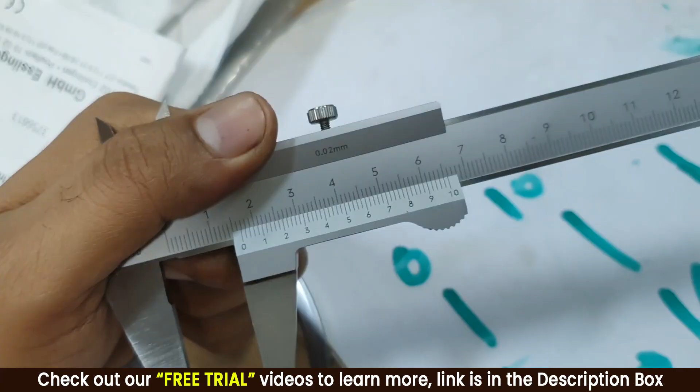Main scale division is 16 mm. Now let me see which value of the vernier scale is coinciding with the main scale division reading. Let me see. Is it 0? No. Is it 1? No. Is it 2? No. 3? No. 4? No. 5? No. 6? No. 7? No. 8? No. Yeah, it is very close to 9, guys.

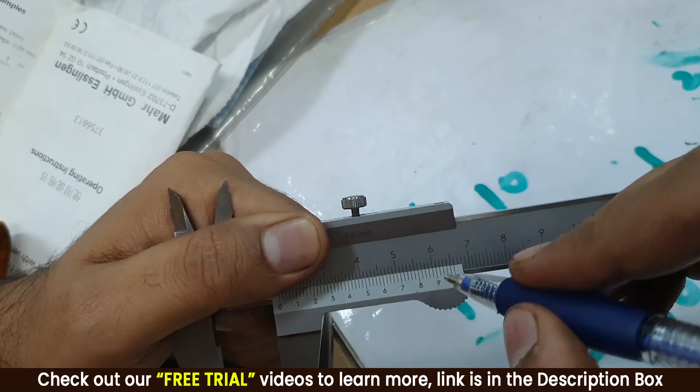Now let me see very carefully which one is it. It is either this one or this one. If I be accurate, I'll say this one is completely matching with this one.

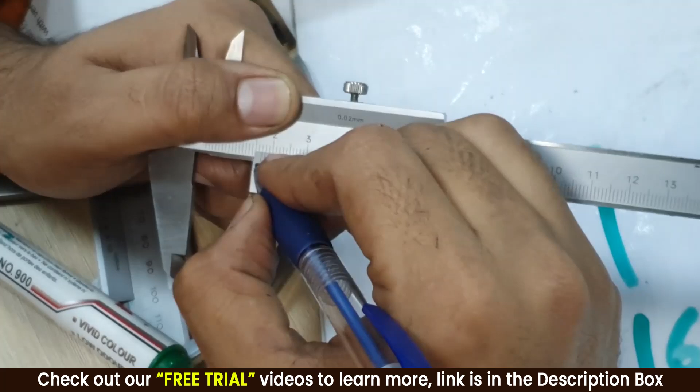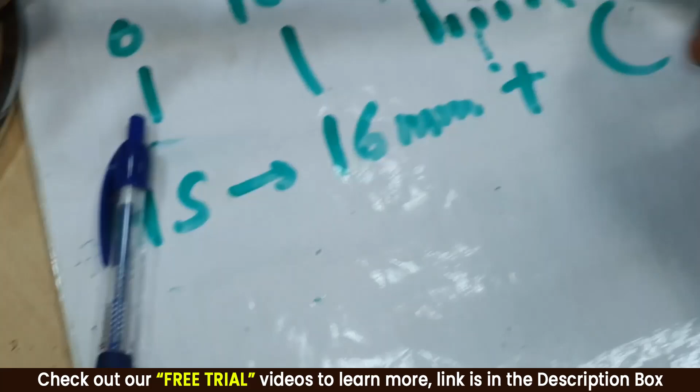Which division is it now? 1, 2, 3, 4, 5, 6, 7, 8, 9, 10, 11, 12, 13, 14, 15, 20, 25, 30, 35, 40, 44th division. So this means 44 into least count.

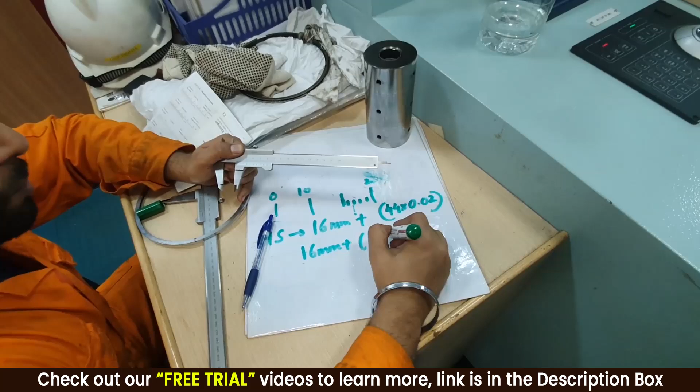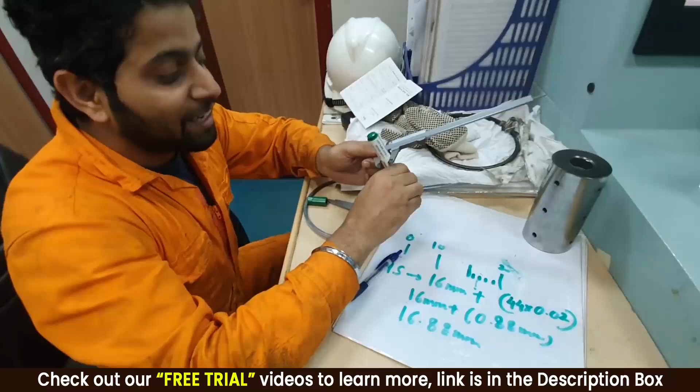The least count is 0.02. That means 16 mm plus 44 into 0.02 is 0.88 mm. So it becomes 16.88 mm. That is the outside diameter of this over here, guys, this marker. I hope you have understood the vernier caliper.

Now let me explain you how to take measurement with the vernier caliper. Now let me talk about how to take measurement with the outside micrometer.

Jai Mata Di. Now guys, see, this is a vernier. This is a micrometer over here. This is the outside micrometer. What is its range? 0 to 25 mm. That means this can maximum measure up to 25 mm.

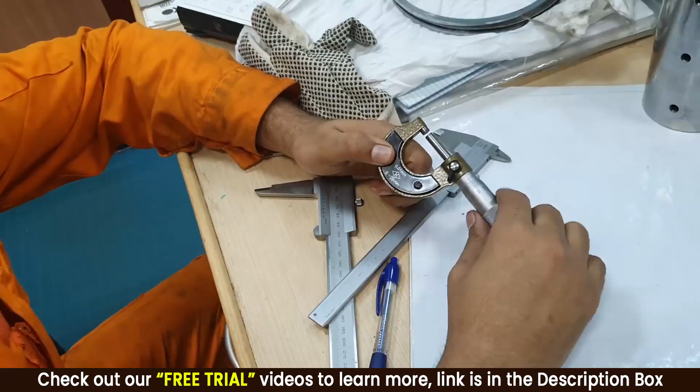Copied, guys? I have got another micrometer. Let me see this one. Is it there or not? It's not in this one. Okay, just this one can measure up to 0 to 25 mm.

For that also there is a way. We put some guides over here. I'll show you, just hold on. Where are its guides? They will be inside. Just keep the video going.

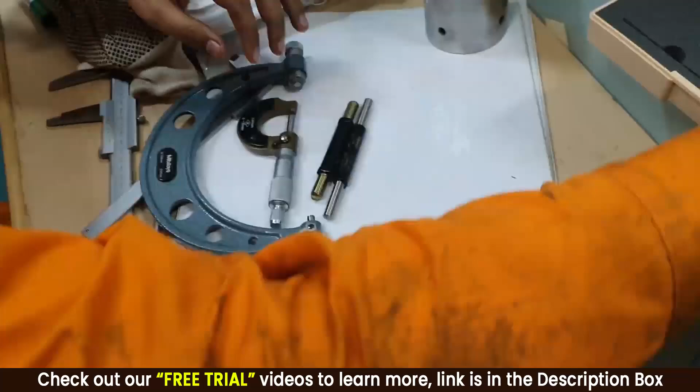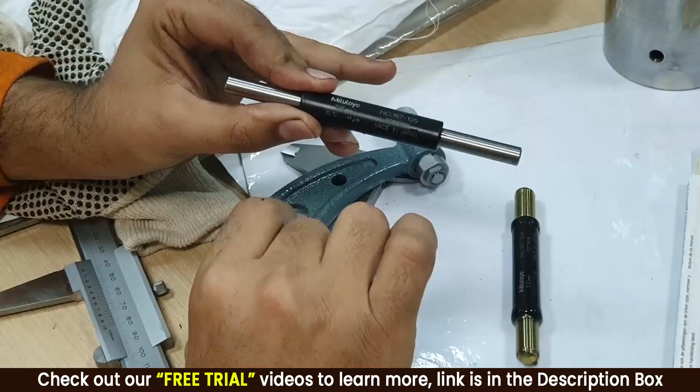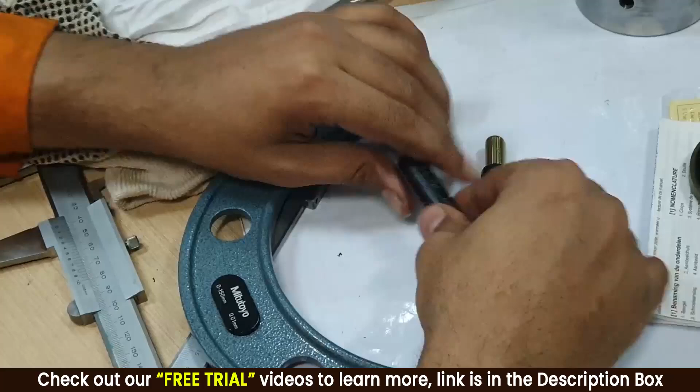See, guys, now this is the one which can also measure from 0 to 100 mm. So we have got these different templates kept over here. It says my length is 125 mm, and surprisingly they have also given temperature, because they know at different temperature it is going to expand. So say it is 20 degrees centigrade in ECR right now. It says my length is 125 mm. Now I have got different templates over here. I make it say 0 over here.

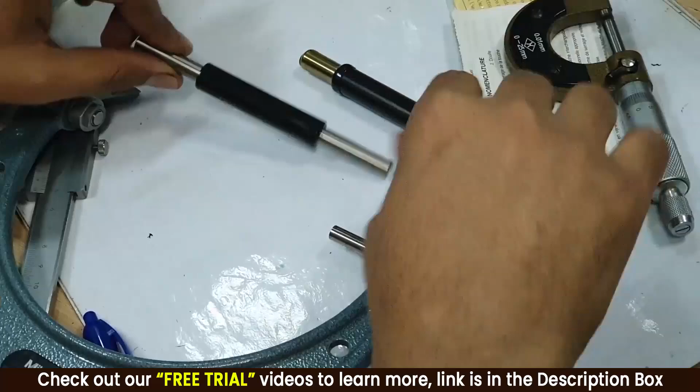First of all, you need to understand the adjustment way. Okay, now if I put a 125 thing, see, it is completely approximately going, that means this is 125 mm. Copied. If I have to make it say 50 mm, so I will take - suppose I have to make it. Okay, just give an example. Let me take out this one.

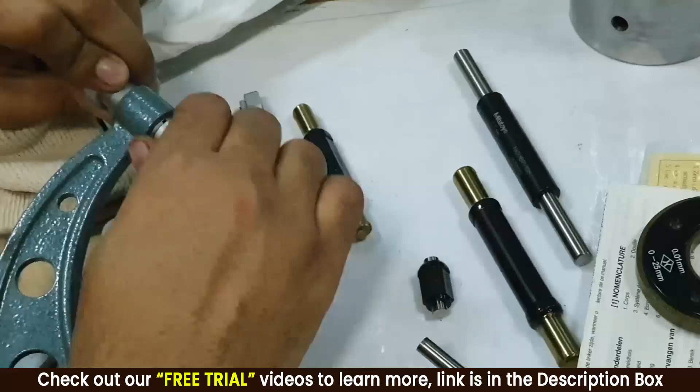This one. So now what happens is I can measure for the smaller distances. Now how much can I measure? Let me see with this template. Maybe this one, and this is how much? 50 mm. So when I put this, it will help me measure only 50 mm distance. So now from 50 to greater side. That is how we can put different templates, and we can use this micrometer even for smaller size and for smaller diameters and bigger diameters.

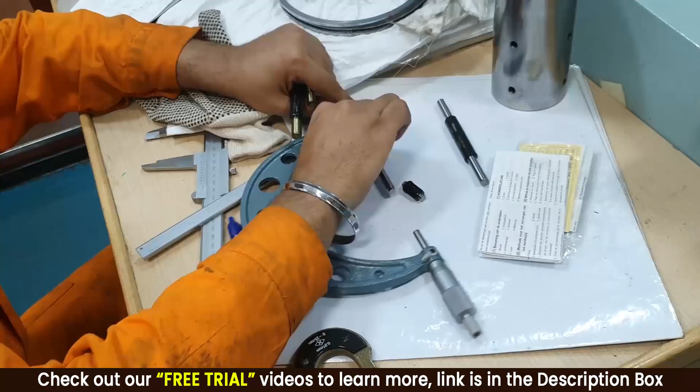But if you want to be very specific, or for small things, we use this micrometer. So whatever calculations that I have to do, I will do on this one. But I was just showing you. So these are the templates and these are the adjusting knobs over here. Now let me put the old one back, because this one was adjusted for crank pin outside diameter.

Copied, guys? Now, if I want to measure the diameter of this piston pin, I will put maybe this one over here. Let me see if this works.

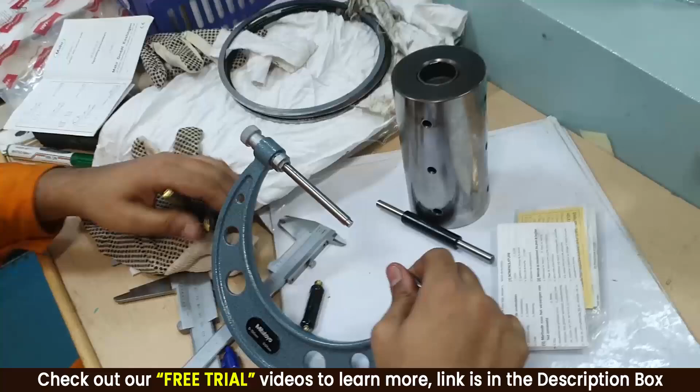I've attached it, let me tighten it. Let me see - no, it will not work. Maybe a smaller one is required. Just let me see. No, this is not going to be sufficient. So maybe a smaller one. Maybe this one. So I've got different templates for all. So I put this one.

And now, if I have to measure, tick tick tick tick tick tick tick tick tick tick tick tick tick tick tick tick.

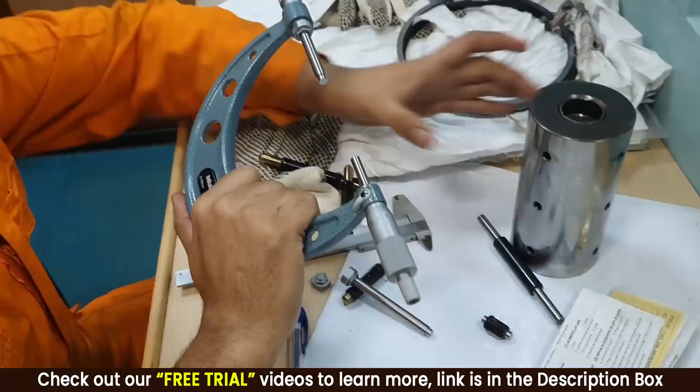See? Now this can fit. Just giving you an example, guys. For the same outside micrometer, if I have to measure different diameters, I can use different templates, different adjustments, and I can measure. Now let me start with the calculation. Let me put all this aside.

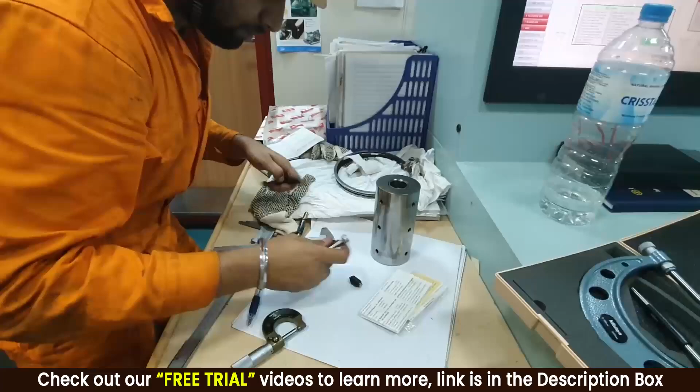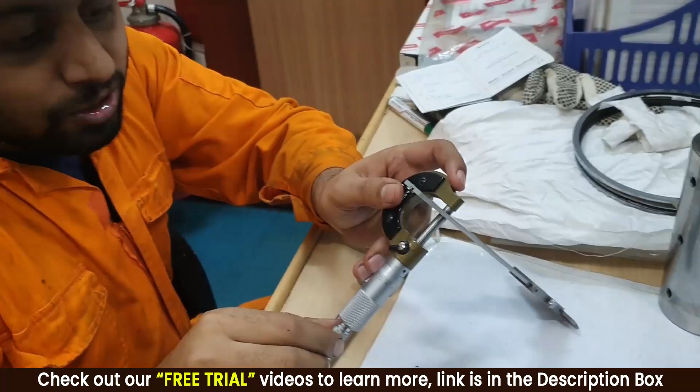Okay, let me come back to the outside micrometer over there. Now suppose I have to measure the thickness of this vernier caliper. So what I do is, first of all, I loosen the screw over here so that it is not tightened, and I put this, and after putting this, now it's loose, yes, loosened. Once it is tightened, guys, you need to adjust it a little. Why? You need to ensure that there should be no clearance over here. It should be completely seating onto this flat surface. There should be no clearance. So no clearance, and you have tightened it not by hand but by this ratchet screw over here, and then you lock it so that it does not move. Okay, it is not coming out because it went inside, guys.

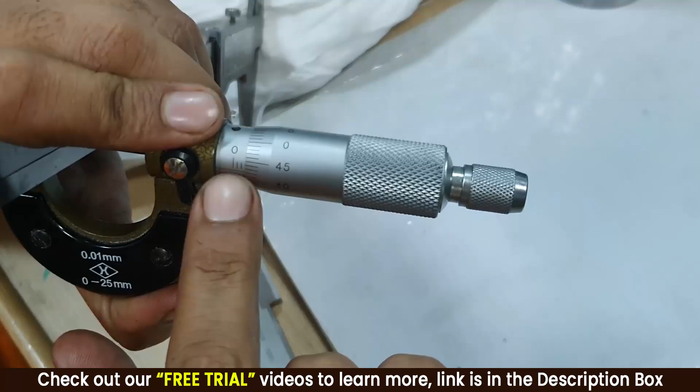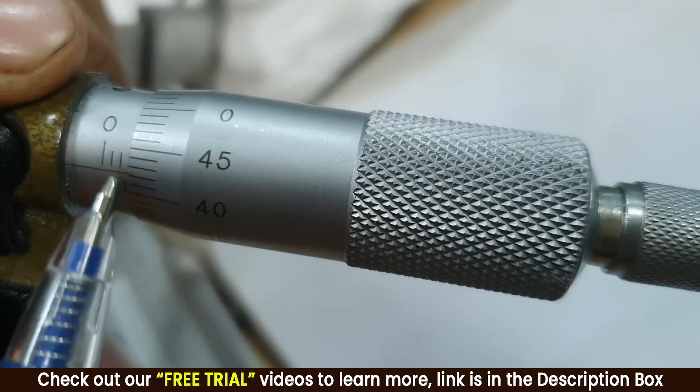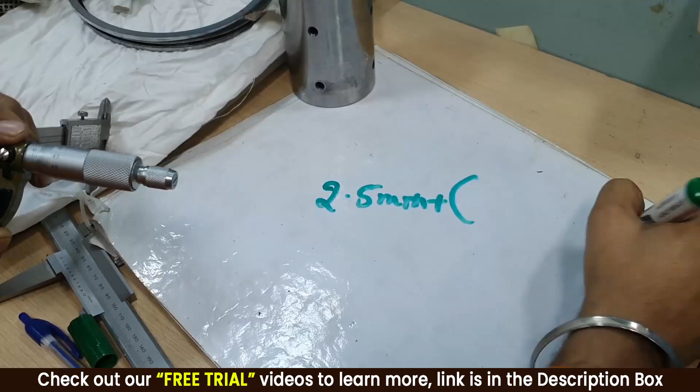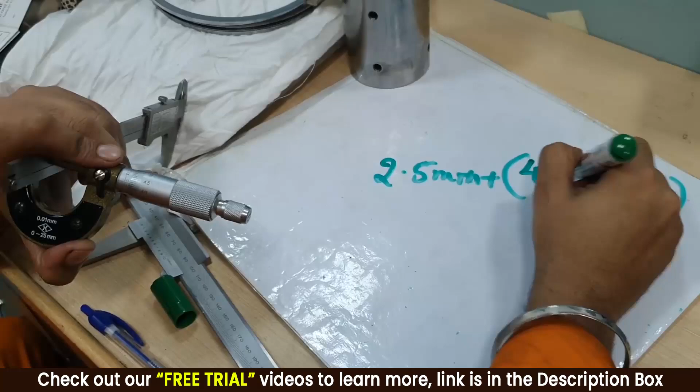So anyways, I'll take the reading over here only. Now I have locked it. Let me see what is the reading, guys. The upper one is 0. This is 0.5 mm, this is 1 mm. This is 0 mm, 1 mm, 2 mm. This is 0.5, 1, 1.5, 2, 2.5, approximately 3 mm, right, guys? So it has crossed 2.5. That means the main scale division is, where is the marker? Main scale division is how much? 0 has crossed, and which readings can I see? I can see 0.5, 1, 1.5, 2, 2.5 mm. So my main scale division is 2.5 mm. Plus the vernier scale division is how much? This is 42, it is clearly matching. Here it is not confusing like vernier caliper, we have to see which one matches over here. So it is 42, 40, 41, 42. So it becomes 42 into the least count, that is 0.01. So it becomes 2.5 mm plus 0.42. So this becomes 2.92 mm to be exact. This is the thickness.

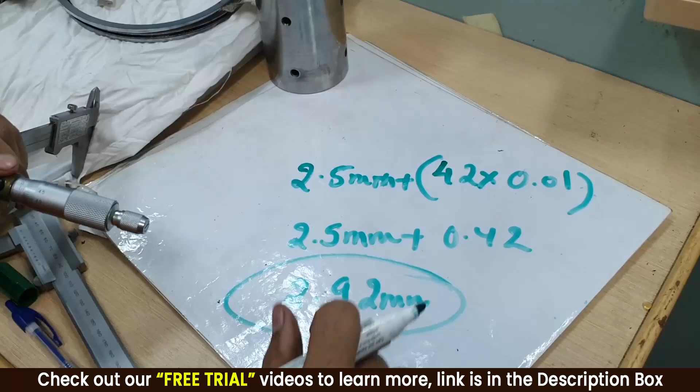Now let's take one more example. Let me unscrew it, take it out. Let me take the example of, just a second. No, this is thin, maybe some circular thing. This is too thin, okay, never mind. Okay, I'll take this pen.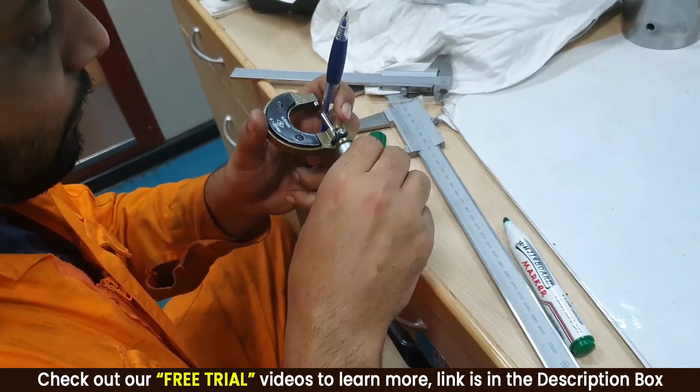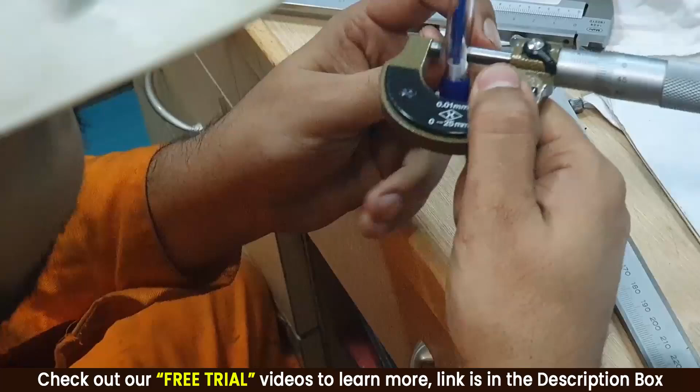When I do the circular one, guys, I have to be very, very careful. I have to ensure that it just goes parallel without touching. So first let me loosen this a little. Now it is loose. Now help me here, just tighten it with this one slowly. Not by hand, do it like this on the hand. Okay, see he's tightening the ratchet screw. Okay, just catching it now. Yeah.

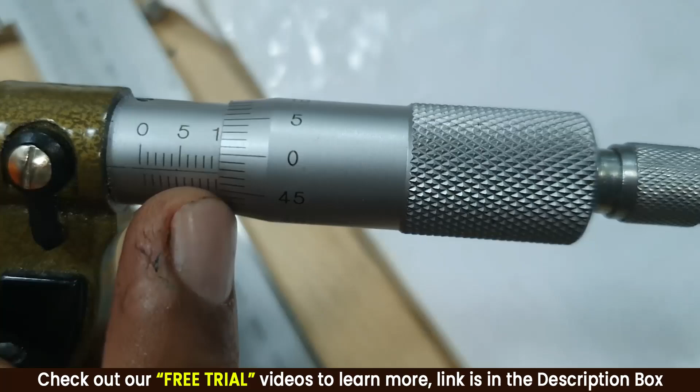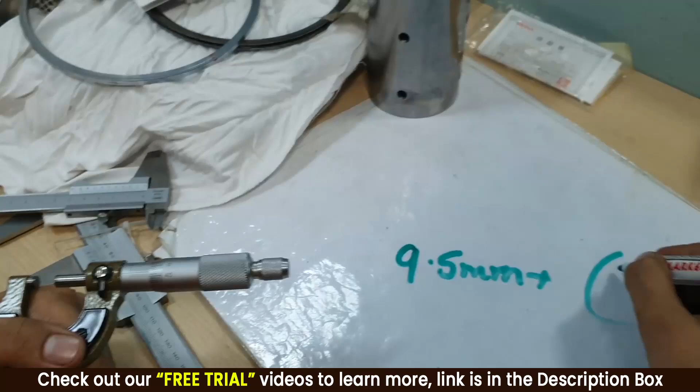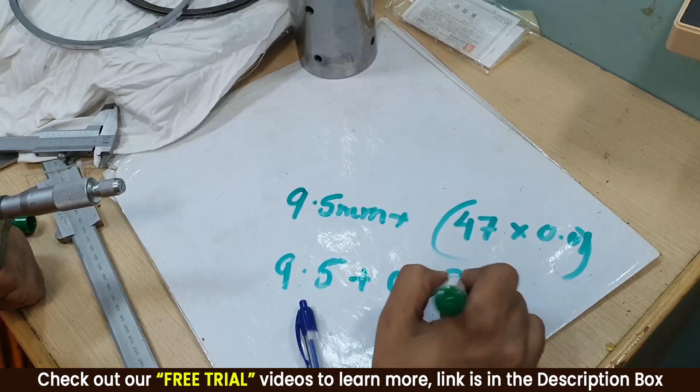Okay, now see, this is the dimension. Now please lock the screw. Okay, locked. Now I can remove the pen. So now let us see what is the reading, guys. So on the vernier scale where is it coming? 5 mm has gone, 6 gone, 7 gone, 8 gone, 9 gone. 9.5 also I can see, guys. I can even see 10 over here. No, I can see only 9.5, guys. This is 5, this is 9, this is 9.5. I am not able to see the other reading. This is the 10 mm. So it is 9.5 main scale reading plus how much is the vernier scale division reading? 46, 47, 47.5, guys, just check it for yourself. Right, so 47.5, we'll take it as 47 into 0.01. So it becomes 9.5 plus 0.47. It becomes 9.97 mm.

All I want to say is, guys, the first time you try to understand everything, it is very difficult. When I am trying to explain the theory, I am also getting so many questions. But all I want to say is, the moment you start using it by hand, it becomes very easy. I'll show you one thing, come over here.

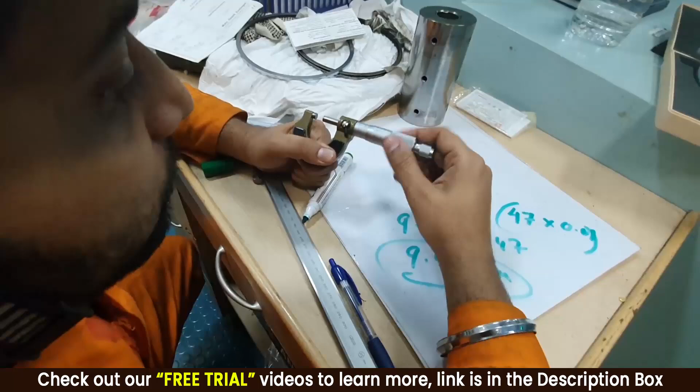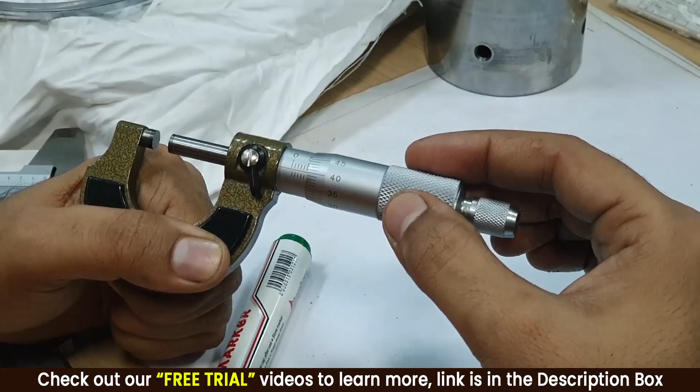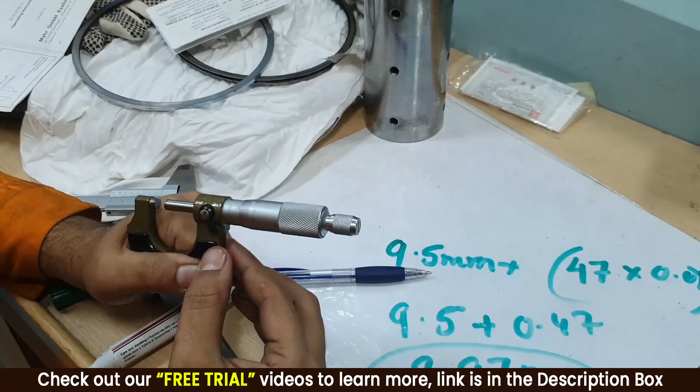Just wait. To be more exact, guys, this is exactly 5 mm because my 0 is coinciding with the 5th mark over here. You can see this is exactly 5 mm. This becomes 5.05, 5.10, 5.15, 5.20, 5.25, 5.30, 5.35, 5.40, 5.45. Guys, this becomes 5.50, and the moment it becomes 5.50, you will see this lower portion now coming out. This lower marking will now start showing. Watch carefully. Now after 5.50, you will see this lower mark going to 5.55. Can you see this lower mark coming now? 5.55, 5.60, again lower mark, that means it is greater than 5.5. 5.60, 5.65, 5.7, 5.75, 5.8, 5.85, 5.9, 5.95, and finally this is 6 mm, exactly touching the main scale at the 6 reading. I'll pull it out a little, you'll see the 6th one. You see, this is 6 coming out.

So guys, that is how you do the micrometer readings. You might be having confusions. If at all you have, go to your college. If you are on ship, go to your engine room and check it for yourself. That is how you are going to help yourself, and you are going to have confidence in how to take the readings. Thank you very much.